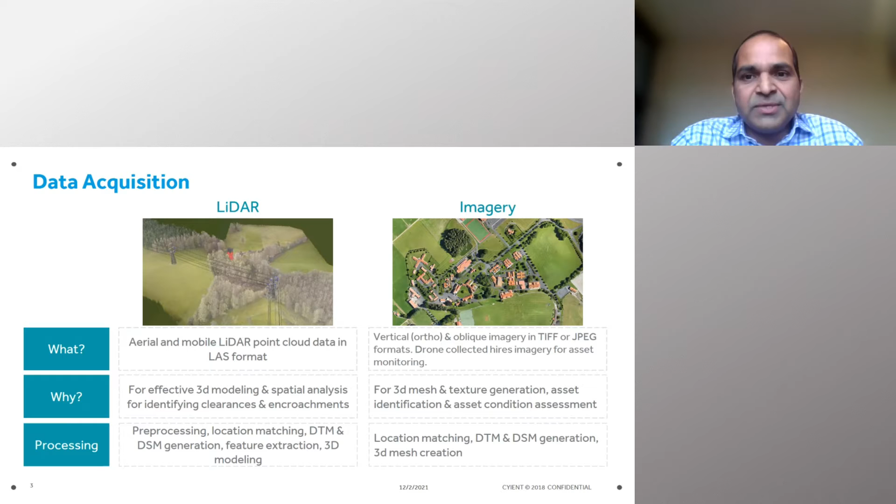Here, primarily, we are talking about LiDAR and imagery, because these two components of the data enable us to build digital twins effectively. And they also help us to trace the fourth dimension that Voxel talked about, the change detection. If we have snapshots of data from previous periods, and we can compare that with the current period or any 2 points of time in the past to identify the changes. And the rest is all computational power, storage power.

Bhoopathi, this is Dan. Your mic is going in and out ever so slightly. I suggest you might lean forward because it seems like maybe when you lean back a bit, your mic goes out a bit. Okay, yeah, I'll be a bit loud and I'll lean forward. Can you hear me okay now? Yes, that's good, thanks. All right, thank you.

So when it comes to LiDAR processing, we have come a long way in the last 15, 20 years, right? So LiDAR processing has been heavy in terms of data size, again, in terms of processing, computing power, it is heavy, but the automation has helped us to process the LiDAR data to a great extent without using any much of the human effort.

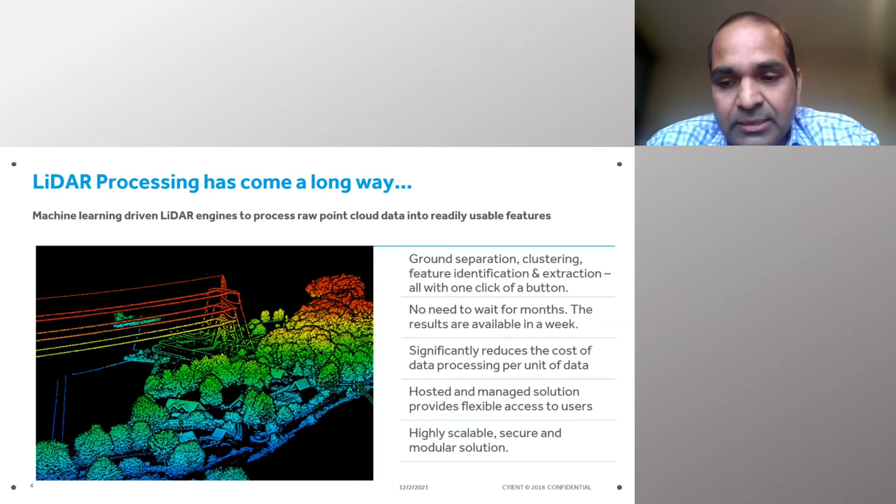So things like ground separation, identifying conductors, towers are pretty much automated now. So we have models to automatically trace ground and non-ground separation, identify conductors and towers and specific aspects of the assets as well. For example, pole assets, pole attachments, like pole transformers can be identified and classified automatically using the machine learning algorithms these days.

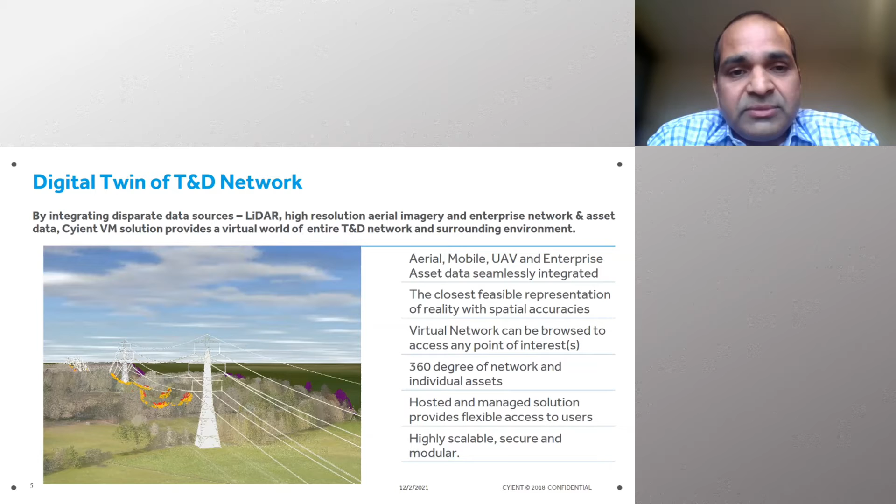Once you have the imagery and the LiDAR, what we do is build up a 3D virtual model. There are existing platforms that support building 3D virtual models or digital twins. Third-party tools also enable immersive 360-degree virtual panoramic views of the network, as good as a human going there and looking around. You can see this digitally on screen by collecting multiple 360-degree images and embedding them into a panoramic view.

Following that is the analysis part, where traditional tools and emerging tools help us identify vegetation encroachments, any human-created encroachments, road networks, water lines, buildings, etc.

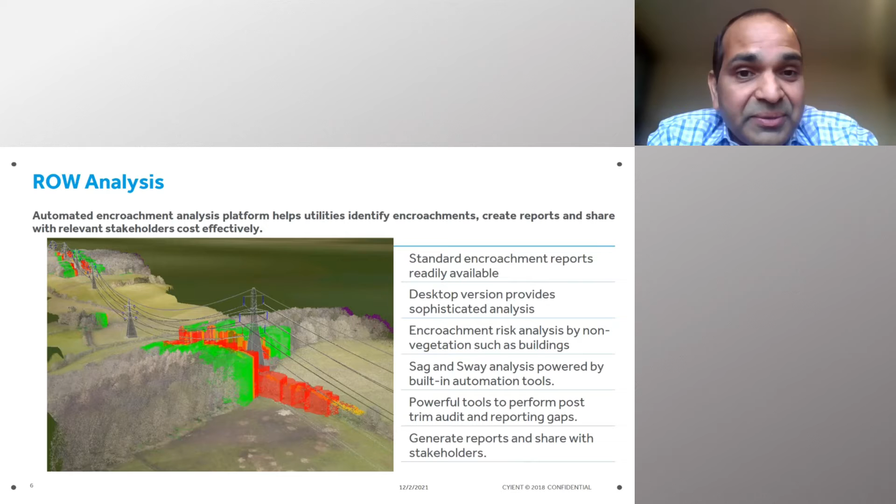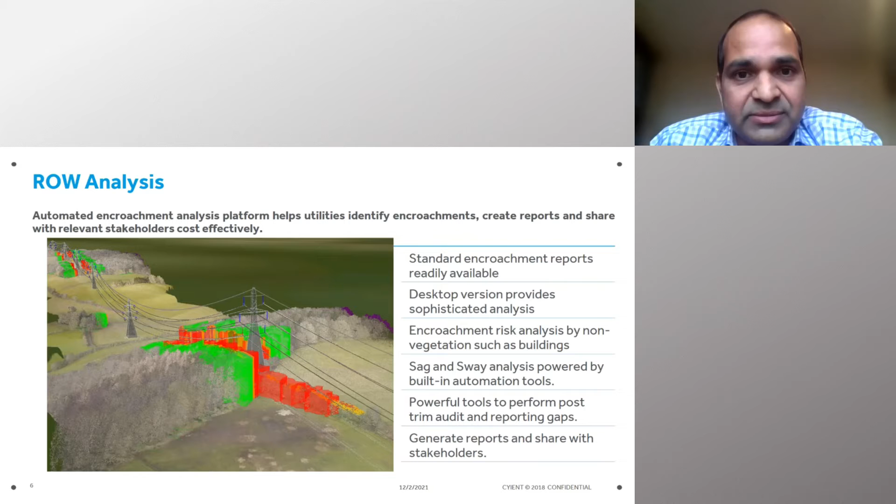Traditional PLS-CADD modeling can also be brought to the web page. Historically, PLS-CADD modeling has been exclusive to the line engineering group, the people with exclusive licenses to deal with PLS-CADD data. Now, once the modeling is done, that PLS-CADD model's output can be brought into the web browser and made accessible to vegetation managers, GIS managers, or even environmental compliance groups. This is what we've done in our solution, bringing PLS-CADD outputs to a browser-based 3D virtualization platform, what we call the digital twin of the utility network.

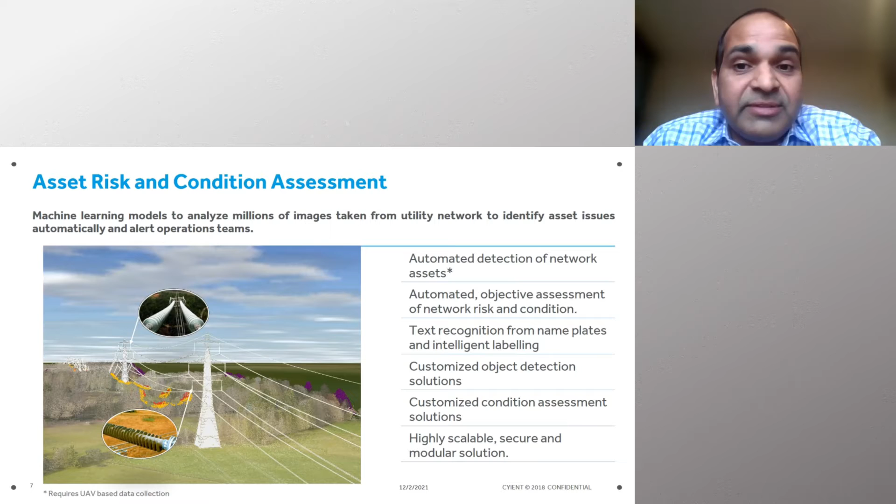On top of that, we're excited about asset identification, enumeration, detection, and condition assessment. There are unique models built for identifying specific assets, like insulators, and even detecting if there is any damage to them. Things such as reading the text on platform-based pad-mounted transformers or other assets is a good possibility today, and we've implemented it in our platform.

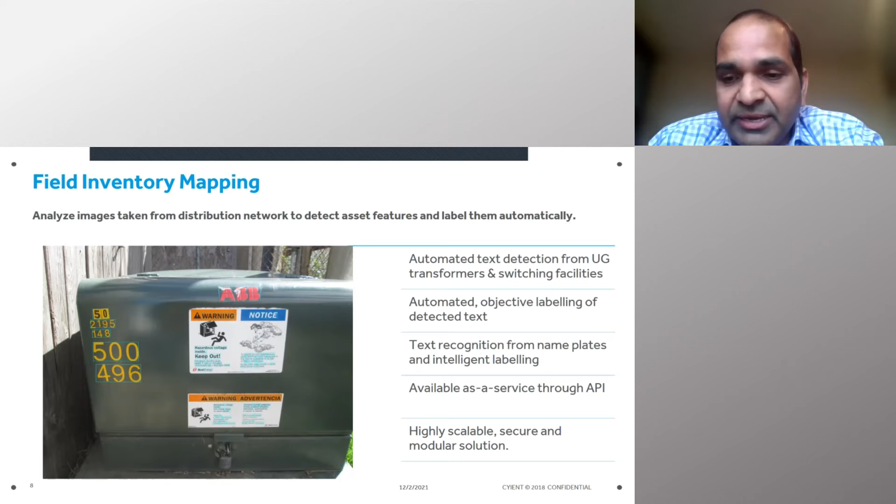A quick list of use cases we've recently implemented for the transmission network includes identifying insulators, conductors, dampers, and bird guards. In all these cases, it's mostly identification, then enumeration of how many there are, and then identifying basic conditions, such as visible cracks or damage.

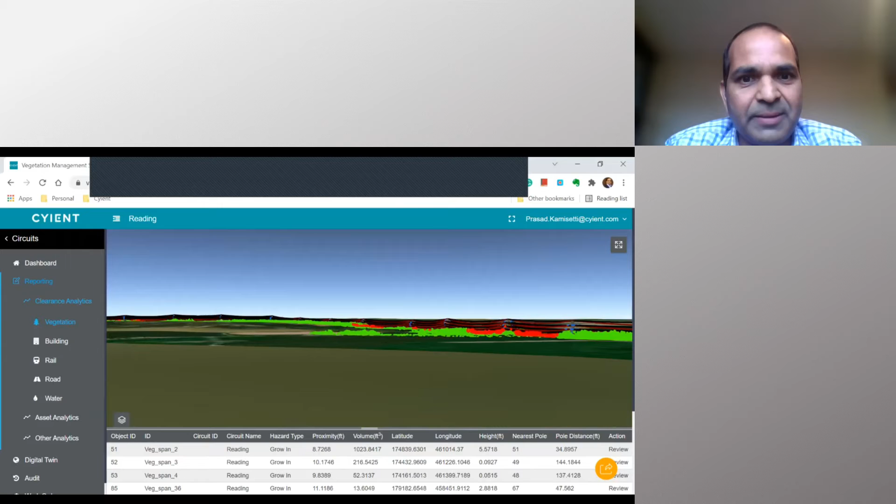Bhoopathi, I wonder if while you're trying to get that going, you could explain it. Oh okay, it looks like you got it going. Yeah, yeah, I got it.

Is this the kind of environment that the end user or client would be in when interacting with this digital twin? Right, so it's browser based. I opened it in the morning and left it there, then opened multiple applications, so the session probably timed out. I refreshed it, and this is how you look at it. It's all circuit based — you select a circuit you want to browse and analyze, and all the modeled circuits are available here. When you click on a circuit, you see a dashboard.

This is all configurable — you see spans, poles, hazards, and the number of grow-ins, fall-ins, and encroachments. All these reports can be custom built, or you can configure what reports and data you want to see here. But the most interesting part is what we call the digital twin of the network, and the various aspects of analyzing it, both from a chart point of perspective.

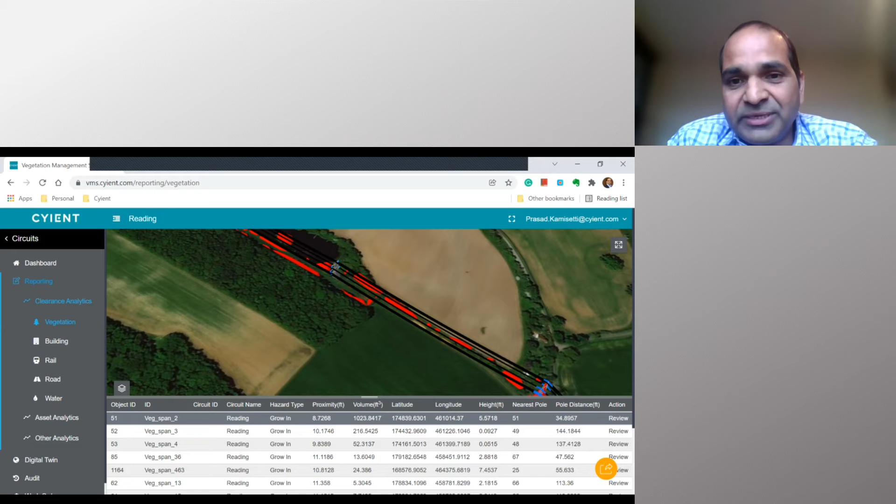You see the encroachment report that typically any vegetation manager wants to see. Something I want to highlight here is the volumetric component of the encroachment — what is the volume of the tree in cubic feet that is under encroachment. We can see that and sort it out. Then if I want to fly to a particular tree, say the one with the maximum volume that needs to be cut, I can just click on that and fly to that particular part of the network.

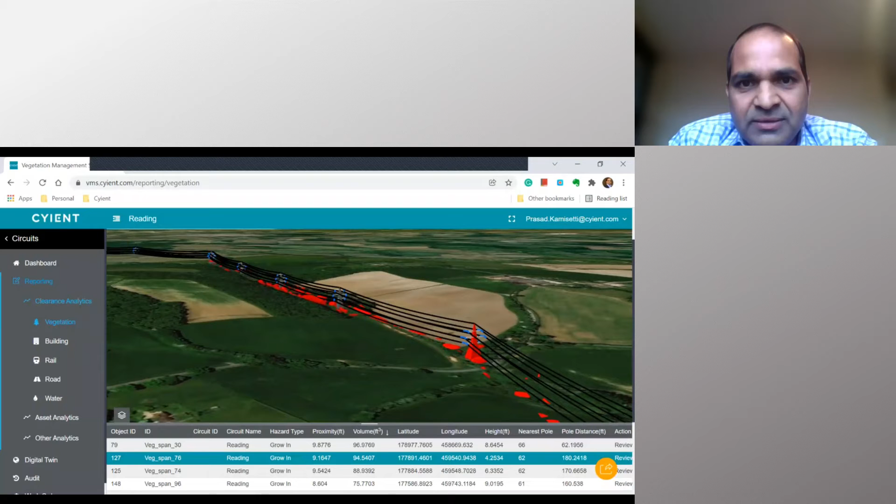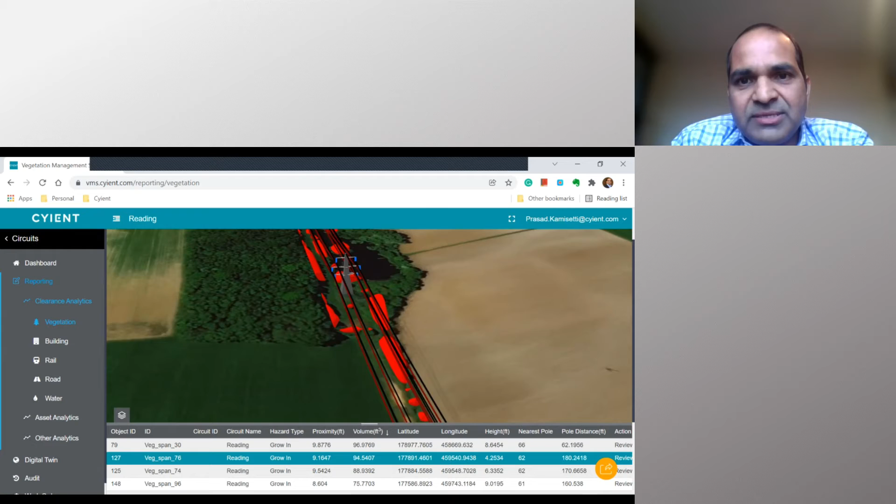Here you see the vegetation encroachments — let me switch that on. This is the as-built condition. Let's say I want to see the max sag condition. With the PLS-CADD modeling, when I get the max sag condition, I can look at it here. Yeah, this is when I see the max sag condition.

The perspective changes. Let me switch on the LiDAR point cloud.

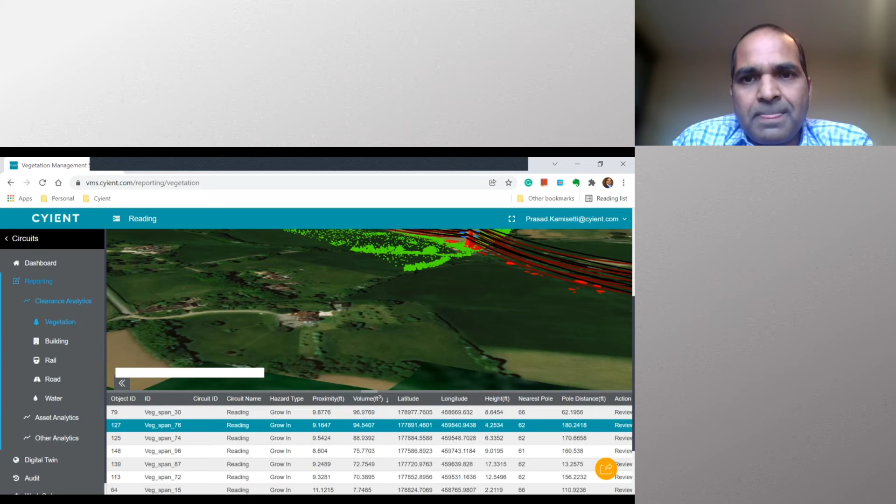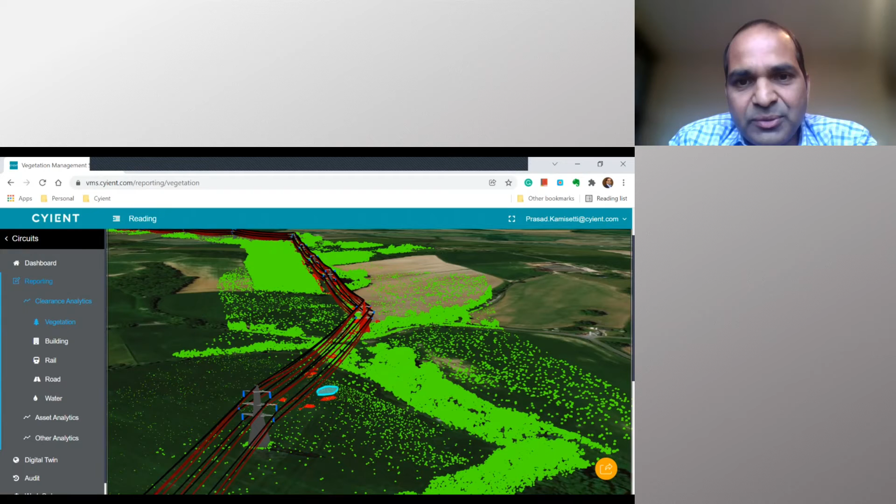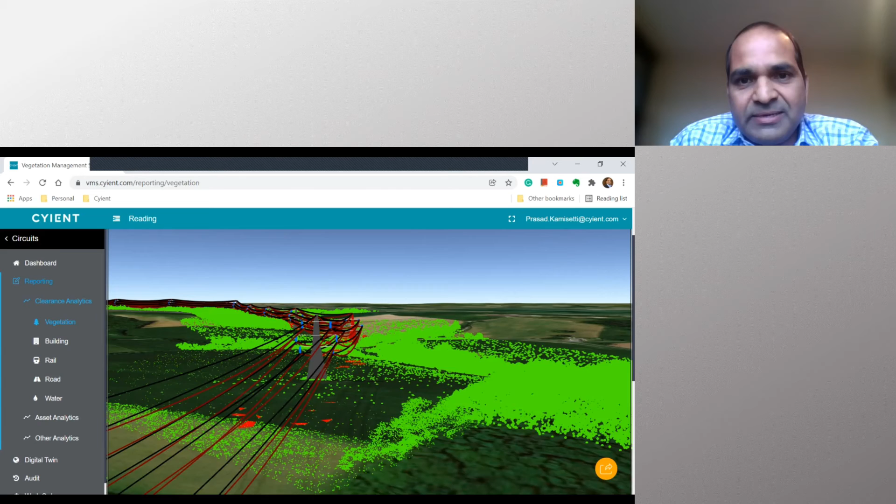So you have max sag blowout condition, and for various situations we can see the encroachment. Every encroachment point has been modeled here, with various aspects available in terms of the span, the grow-in, fall-in, and what kind of encroachment it is. You can see the same thing not only for vegetation, but for building encroachments, rail, roads, water bodies, and various sorts of both man-made and natural hindrances to the network.

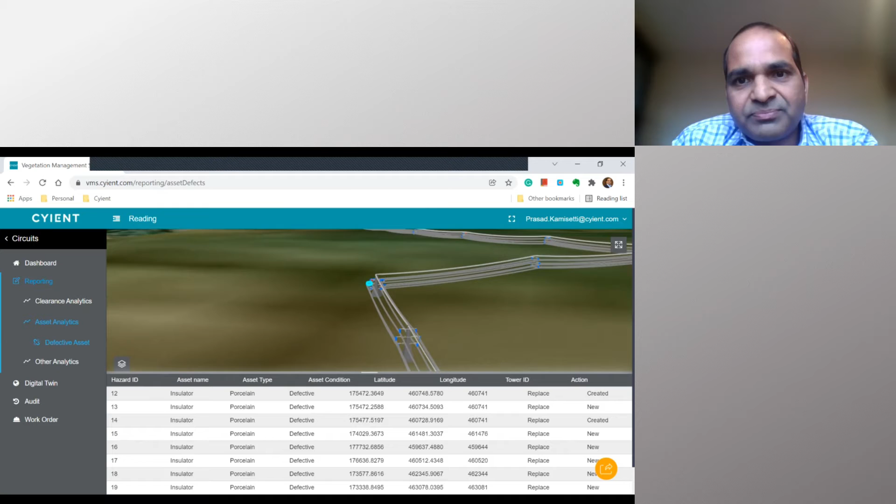We also have asset analytics. Asset analytics is about identifying particular defective assets, for example, as I was talking about a model for detecting insulators and their defects. The way it works is that it categorizes and lists all the defective insulators, and when you click on a particular insulator, you can fly to it and look at the defective part of it. For example, these are all the insulators that are defective, it's a porcelain. I click on one of them, and I can fly to that particular part of the network.

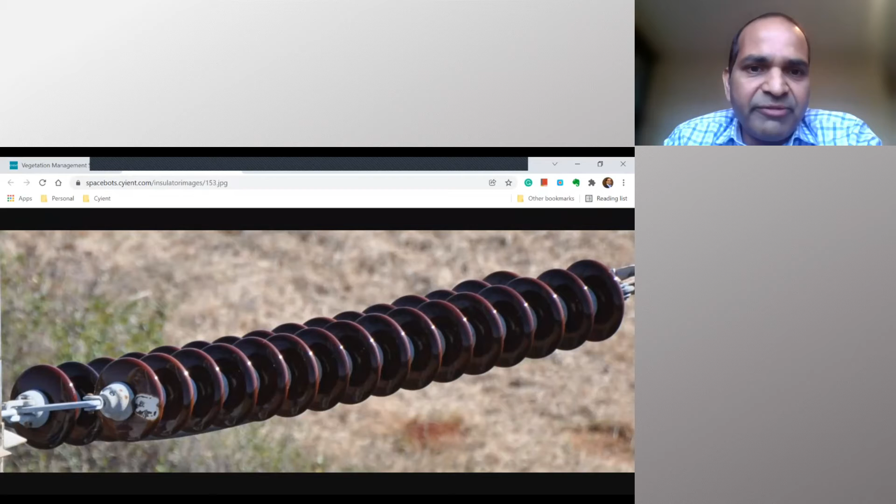So it's relatively heavy data, but optimized for delivery on the browser, as you see here. I can identify the insulators that have a particular condition. Here we're talking about insulator porcelain defective, and I can look at the imagery. So this is flashed here - it's UAV-acquired imagery, processed and tagged to the network, and made available for viewing and analysis.

Similarly, we have other analytics such as pole lean. The pole configuration has been analyzed and processed by algorithms to detect lean, and a report has been prepared and made available for viewing, or you can just jump on a particular pole and identify that lean.

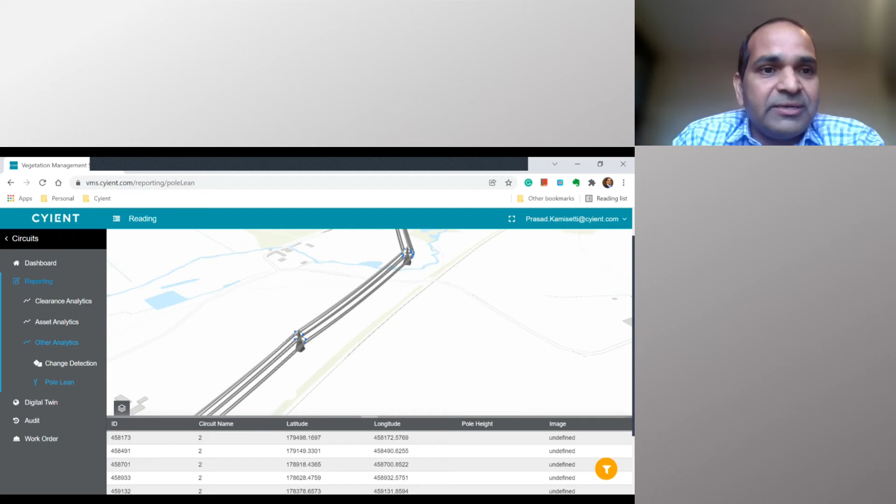So the reporting aspect is rich with all the data. You can export this data to Excel or PowerPoint, or simply if you want to see a digital twin alone, the digital twin part is purely a 3D virtual network that you can navigate. You have snapshots available - if you want to go back to a previous year's snapshot or current year snapshot, that will give you a change detection aspect.

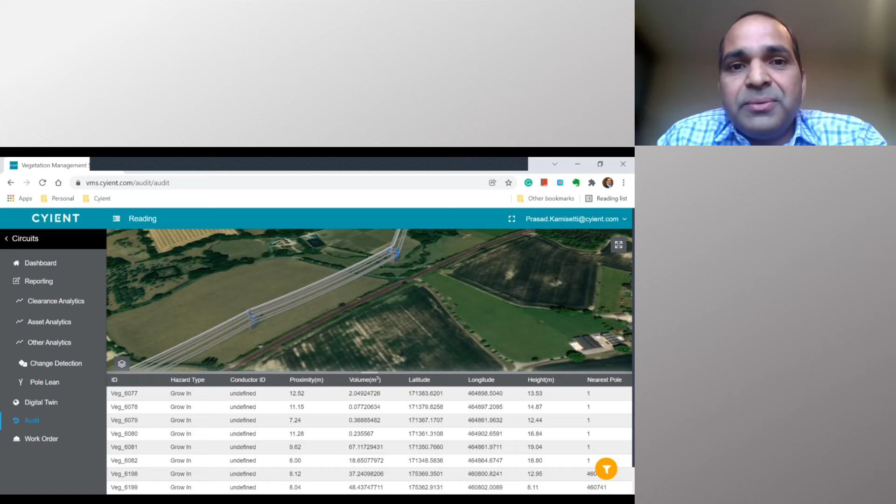A subset of that is what we call audit. For example, before trimming you have a snapshot, but after trimming the vegetation you have a new snapshot, and that would give you the change detection. So it will be useful for identifying or verifying the trimming jobs, the quality control aspect of it, and also to check if there is any new construction or new changes to the network. All those things can be identified in the audit process.

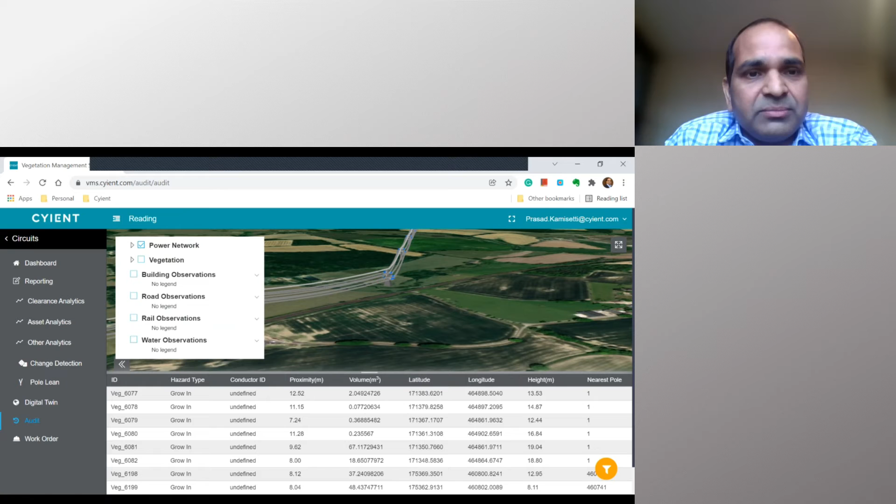This is possible when you have at least two snapshots of the data or more. So in every case, you have both power network, that is general standard condition, max sag condition, or blowout or max sway condition. You choose the particular assets that you want to see - insulators or shields - or leave them away. You also can switch on LiDAR point cloud for improved visualization, or if you want to quickly navigate without loading heavy data, you can do it without LiDAR data as well.

So that in a summary is the solution. This is available both for transmission and also distribution. I have a distribution sample here, which is pretty much the same, but the context is in distribution. You have different kinds of attributes, different points of interest here, but the solution is the same - the way it is rendered is the same.

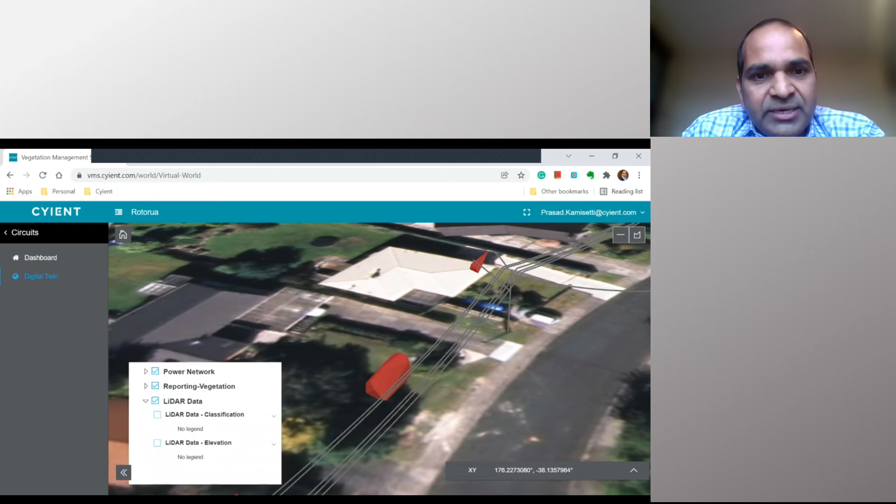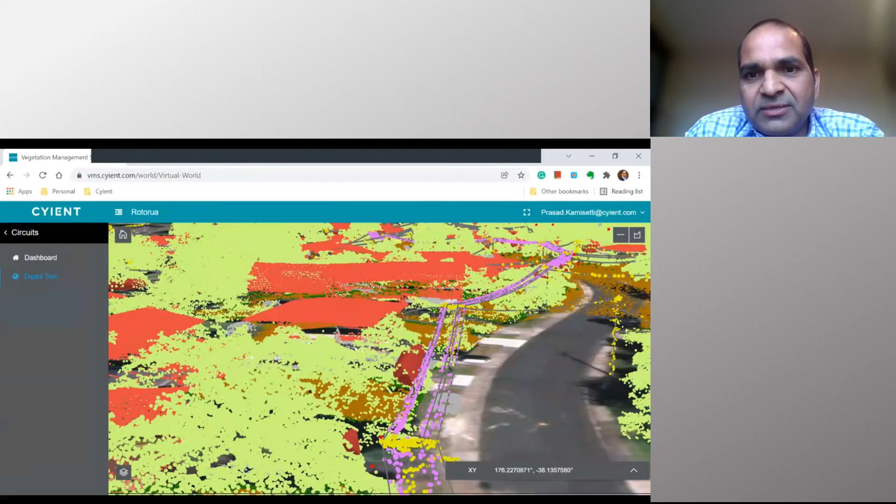So these are the vegetation encroachment blobs identified, pre-configured and loaded. You can switch that off and directly move on to the LiDAR data if it is of interest. As you see, this is for the entire circuit level of LiDAR data loading into the browser as you start browsing for it.

So each and every conductor is modeled, every asset is individually modeled, and the data is pulled out from the asset management systems here. That is in a nutshell the summary.

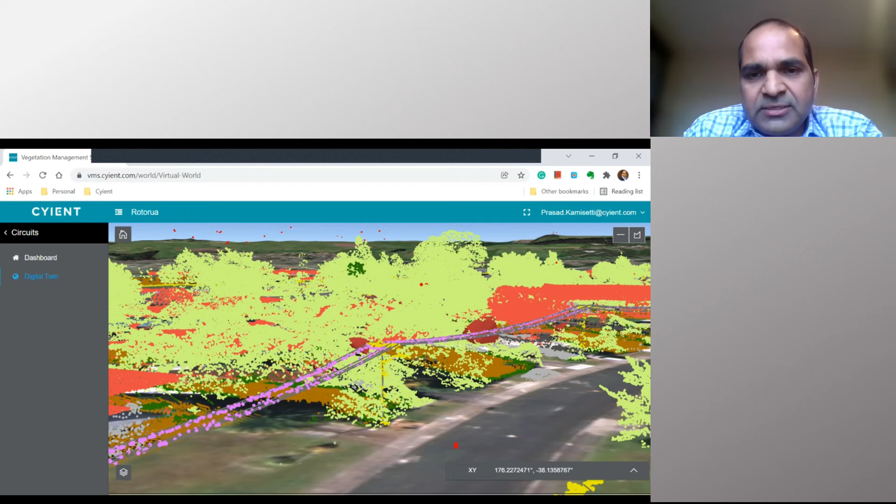I would like to answer questions if you have any.